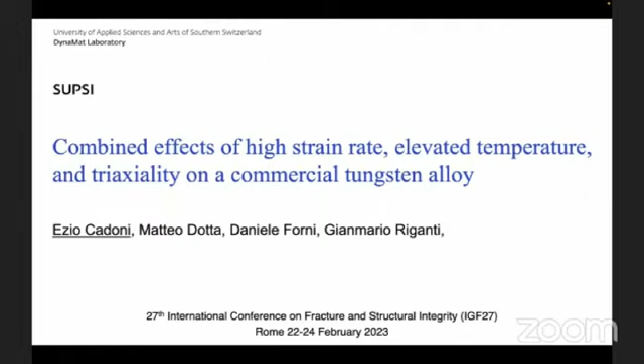The aim of this contribution is the description of the mechanical characterization of a commercial tungsten alloy under extreme conditions of temperature, loading, and triaxiality. In fact, these aspects are crucial, and many industrial applications have to consider them. For this reason, a deep knowledge of the mechanical behavior at high strain rates of the considered material is required.

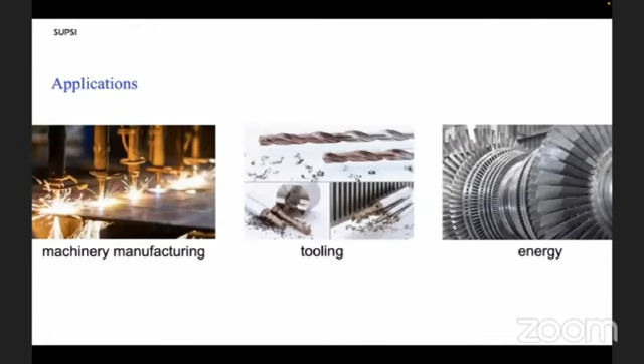In general, machinery manufacturing or transport, as well as energy industries, have important dynamic phenomena that are simultaneously affected by extended strain, high strain rate, damage and pressure, as well as elevated temperature gradients.

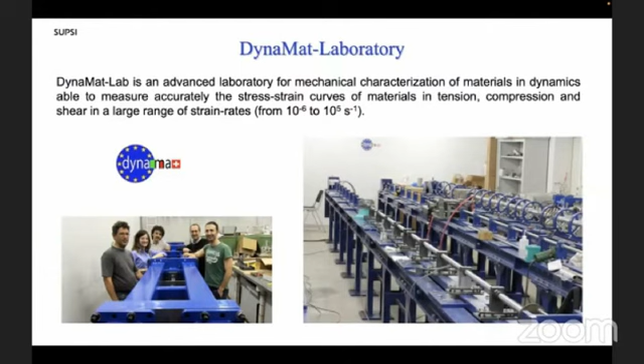These data were obtained at the Dynamat laboratory, founded by me in 2006 at my university in Lugano. It is now one of the laboratories of national relevance recognized by the Swiss Confederation and Swiss National Science Foundation. Dynamat lab is specialized in studies of the dynamic response of materials over a large range of strain rates, and is well equipped with cutting-edge technologies in this field.

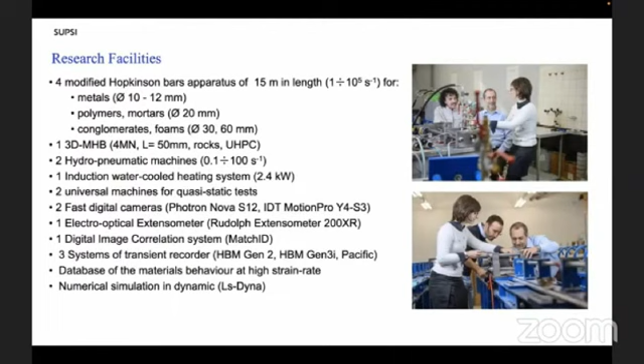Tungsten alloy is a type of cemented carbide in which tungsten carbide particles with extreme hardness are embedded in a matrix metal such as cobalt or nickel. The carbide particles provide hardness but are in themselves very brittle. However, combined with a ductile metal matrix, outstanding material properties are achieved.

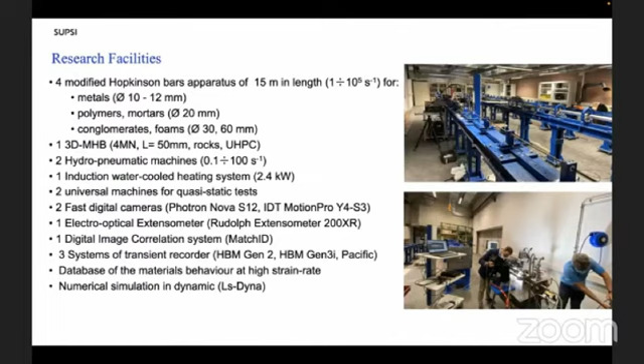Such as high wear resistance, low friction, and hardness at high temperature. The most common application for tungsten alloy is cutting tools for hardened steels, in which the hard carbide particles provide the cutting surface, while the metal matrix isolates the particles from one another and prevents particle-to-particle crack propagation. There is a lack of experimental data on the thermomechanical response of these refractory metals to high strain rate effects.

at elevated temperature higher than 1000 degrees Celsius. The behavior of material under these conditions is of great interest from a phenomenological point of view, for example, testing the consistency of different constitutive models.

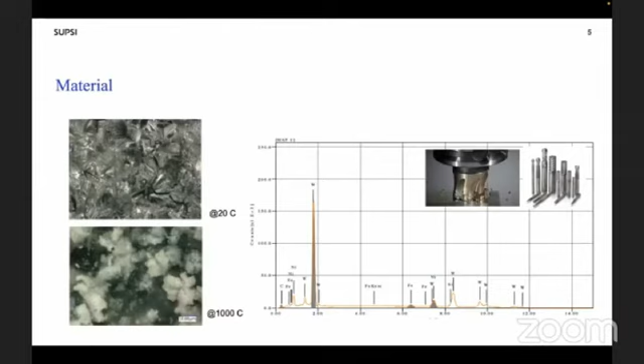Testing was conducted on smooth round specimens of 2 millimeters in diameter and 5 millimeters gauge length. Three notch configurations were used to evaluate the effects of different triaxiality conditions on stress and strain, while keeping constant the net cross section of 2 millimeters in diameter.

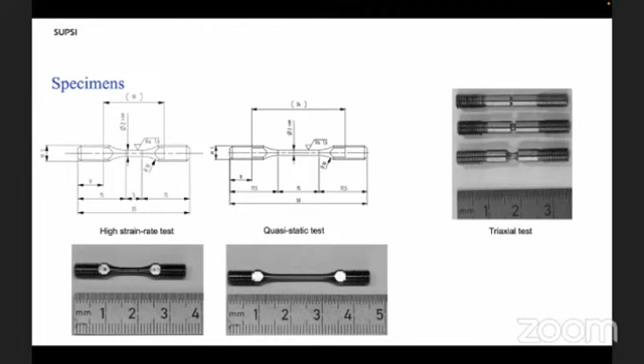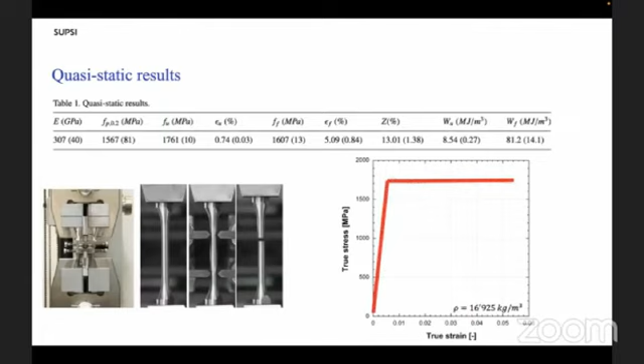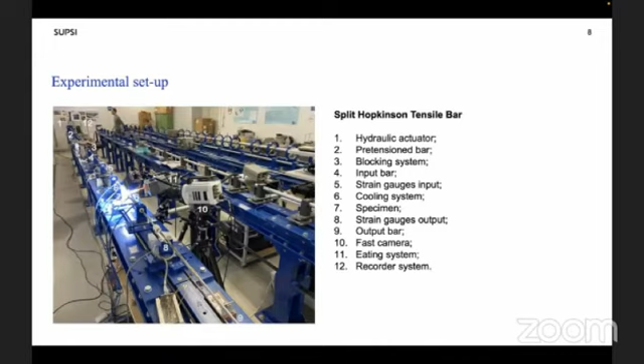It consists of two straight circular bars with a diameter of 10 millimeters and lengths of 9 and 6 meters. The first 6 meters of the longer bar is used as a pretensioned bar, while the remaining 3 meters is used as the input bar. The second bar serves as the output bar.

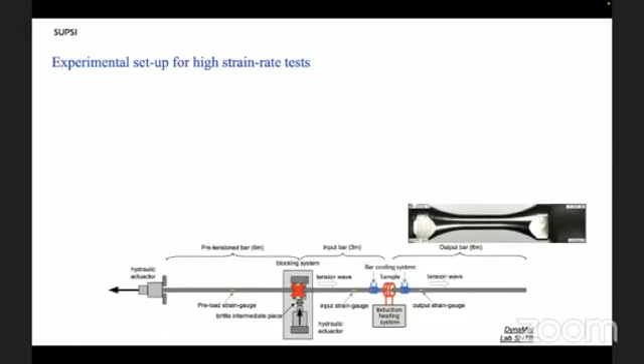The tungsten alloy specimen is screwed normally into the input and output bars. By means of a hydraulic jack placed at the end of the bar, and thanks to the blocking device, the pretension bar is pulled, so we can store elastic energy and regulate the velocity in relation to the load amplitude.

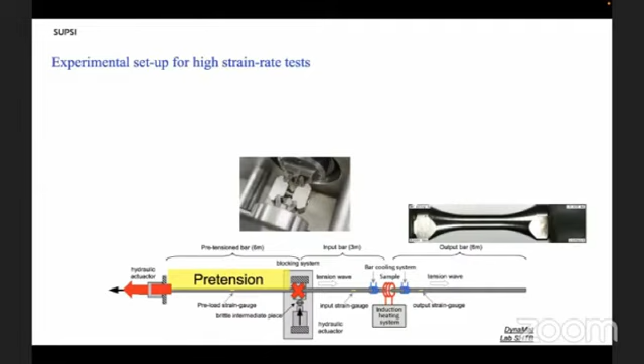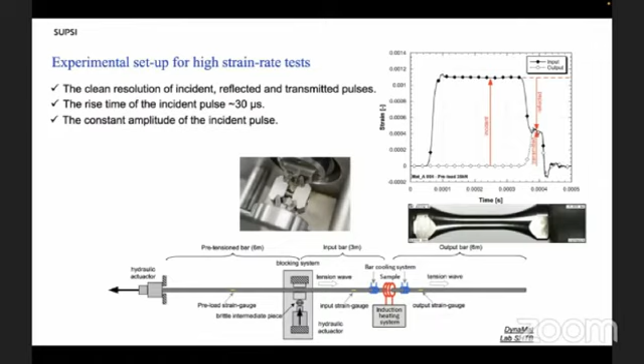So we obtain very clean signals in terms of incident, reflected, and transmitted pulse, and the constancy of the incident pulse. The tests were carried out at high strain rate at room temperature and elevated temperature, and for the last one, thanks to the induction heating system, we are able to heat up the sample to elevated temperature, obtaining a picture like this one.

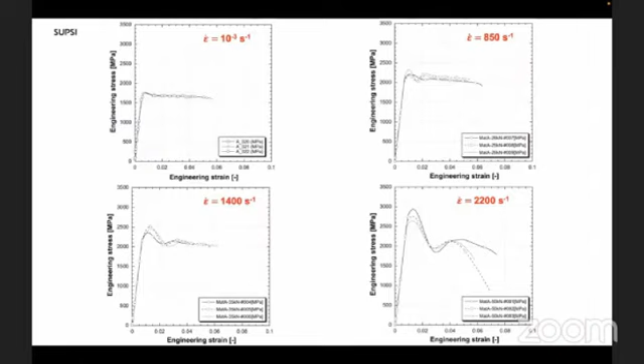Three targets of high strain rate were set: 850, 1400 and 2200 strain per second, obtained by imposing respectively at room temperature 26, 35, and 50 kilonewtons in the preloading bar. In fact, it's possible to observe a significant increase of the strength and strain capacity.

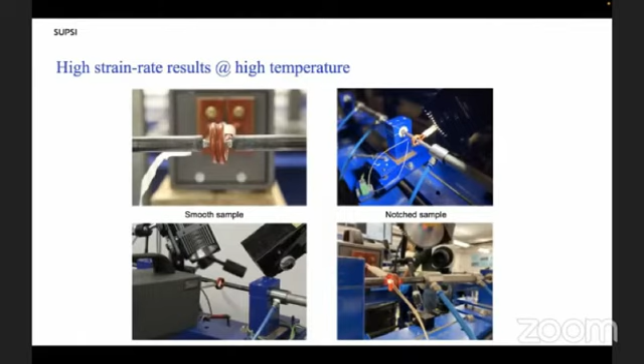One of the main challenges in studying the influence of high temperature on tungsten alloy under high strain rate is the lack of experimental data, because it's very difficult to generate the necessary high strain rate loading at high elevated temperature. This is why the preliminary study has been conducted.

Keeping the same loading conditions, we have observed a general increase of the evaluated strain rate with increasing temperature. You can see that the testing at different temperatures uses the same input signals, so it's not affected by temperature, but the reflection waves are. With increasing temperature, the effective strain rate is expected to increase linearly.

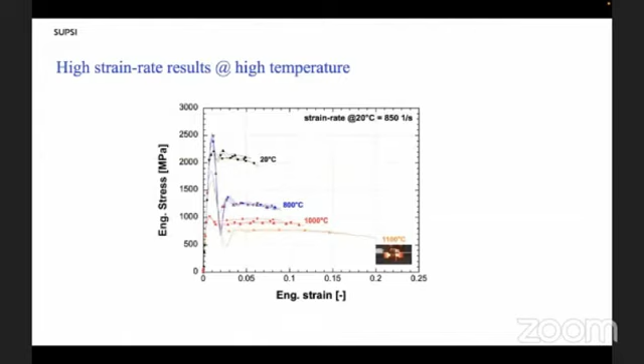Now, at room temperature, with the constancy of 850 strain per second, we increase the temperature and obtain these results using the same preloading conditions, with the temperature varying from ambient temperature up to 1100 degrees Celsius. It can be noted that the strength of this commercial tungsten decreases with increasing temperature under strain rate loading conditions, and the fracture strain increases in the same interval.

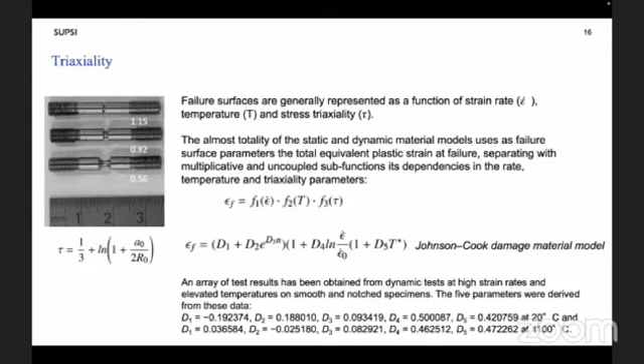As a conclusion, this preliminary investigation on the mechanical response of this commercial tungsten alloy was performed to analyze the effect at different temperatures, strain rates, and triaxiality. A methodology for testing materials at high strain rate was presented.

The methodology consists of performing dynamic tests in tension using the split Hopkinson tensile bar and heating the specimen using the induction coil system. The heating system is properly designed to concentrate the heat flux in the gauge length of the specimen, and the investigated temperature range was from ambient temperature up to 1100 degrees Celsius.

So the next step will be addressed to eliminating the problems of oxidation of these alloys, creating a vacuum protection, and improving the setup to allow fast video recording of the test, capturing the post-failure phenomena.